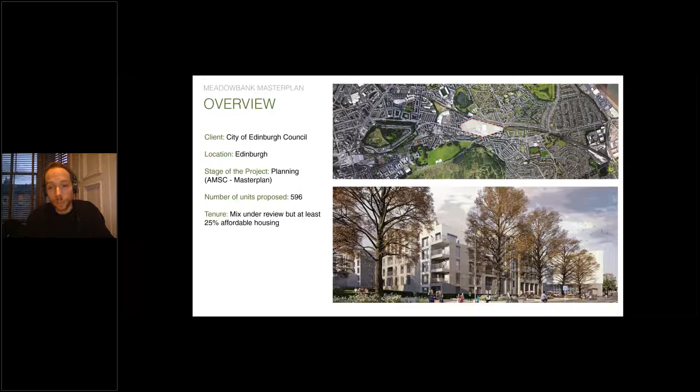The sports centre itself is by another architect, Holmes Miller, but Collective led the housing scheme. There are 596 units of mixed tenure with a minimum of 25% affordable housing proposed. And the project is currently in master plan stage and has just received planning approval.

So this is the approved master plan. You can see the proposed housing surrounding the new sports facilities, a variety of housing types ranging from 2 to 7 stories across the site.

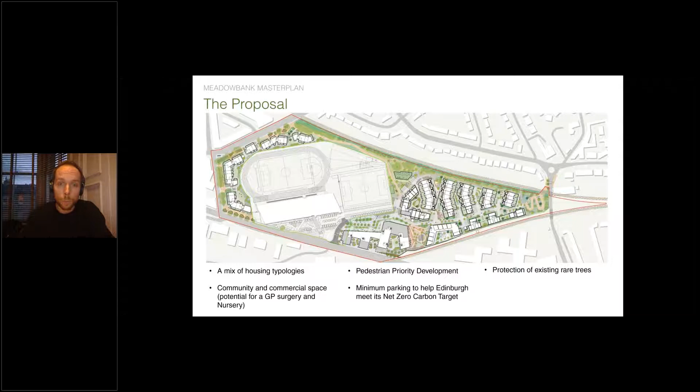So roof types aren't actually specified in the planning application at the moment. No green roofs were considered as part of the scheme before the study. The proposal instead adopts an integrated SUDS approach using swales and rain gardens to treat water runoff. The council will, however, consider how green roofs could be incorporated at the next stage, taking into account the findings of this study.

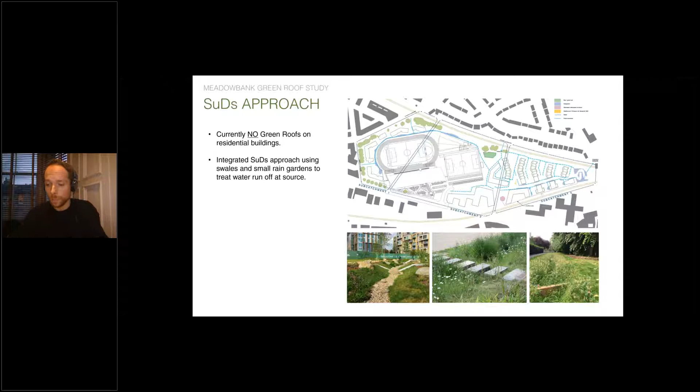Excuse me. So the question we were asked to explore was, are green roofs viable in Scotland? Using the Meadowbank project as a case study. And the key aim was to demonstrate the business case for green roof infrastructure.

Interestingly, unlike large parts of Europe, there are no mandatory policies or incentive schemes at a national level in the UK when it comes to green roofs. London has successfully embedded requirements for green roofs through the planning process and local development plans, with significant increase in their adoption. This has placed a weight of expectation on developers and local authorities alike. However, there doesn't seem to be the same expectation or uptake in Scotland yet.

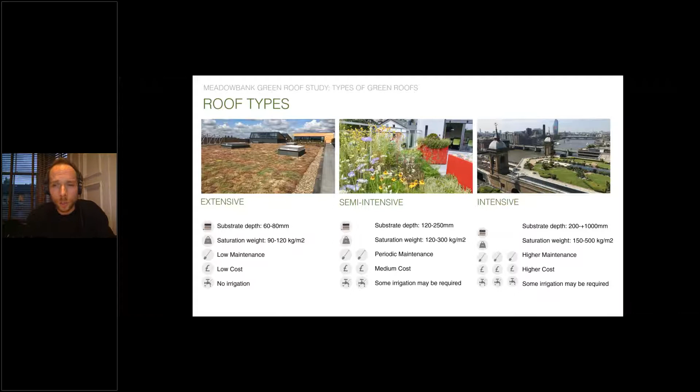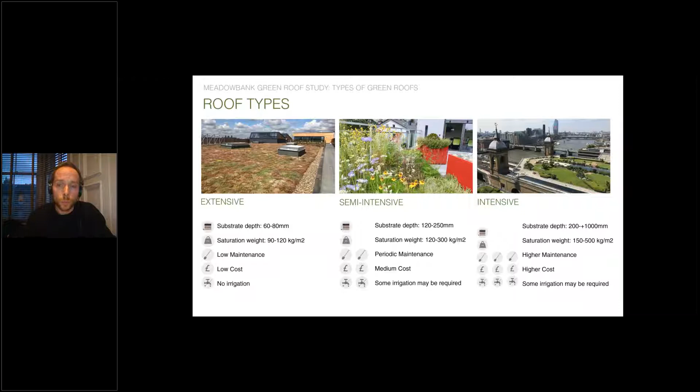So taking a step back, we started to look at the key green roof types. There are three main types: extensive, semi-intensive, and intensive. I'm not going to elaborate on these today, but instead I want to touch on three variants that were more relevant to the Meadowbank scheme.

And the first is the extensive wildflower biodiverse roof. This is creating small topographical variations in the substrate to create a variety of habitats, from wildflower meadows, dry riverbeds, pools, and boulder areas. And this is the type of green roof that our specialist Dusty Gedge advocates over a more conventional extensive roof.

The cost uplift between the two is minimal, but the ecological benefits are significant. The next type is solar green and biosolar, which combines a typical PV array with a green roof. Condensation builds on the underside of the panels and can be used as runoff to maintain the vegetation below, creating unique habitats. And the third is the blue roof, as Ivan has already touched on.

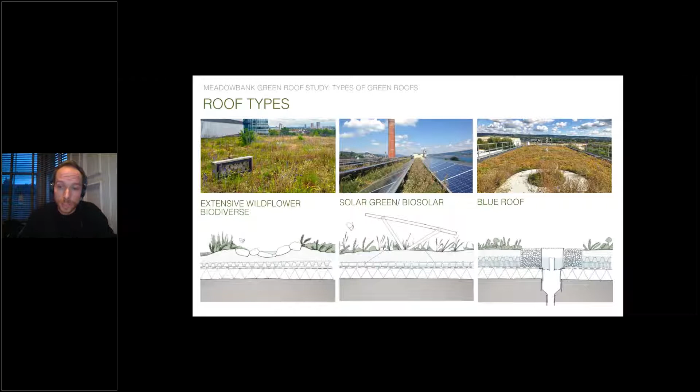In terms of water storage capacity, this is a much more engineered solution using geotech products to create a drainage layer and a void space, which together controls the flow of water to gradually drain to a specified runoff rate. And unlike the other forms of SUDs, blue roofs can really help to free up developable area at ground level, reducing the need for below ground drainage requirements such as attenuation tanks, which is particularly relevant for the Meadowbank site.

We took a place-based approach to assigning the roofs, assigning an appropriate roof type to each building. This took into account how the different roof types can be used to create a variety of spaces, from formal to informal, public and private. Each roof type can create different uses and applications, such as creating opportunities for habitats, play, food growing, and enhancing health and well-being.

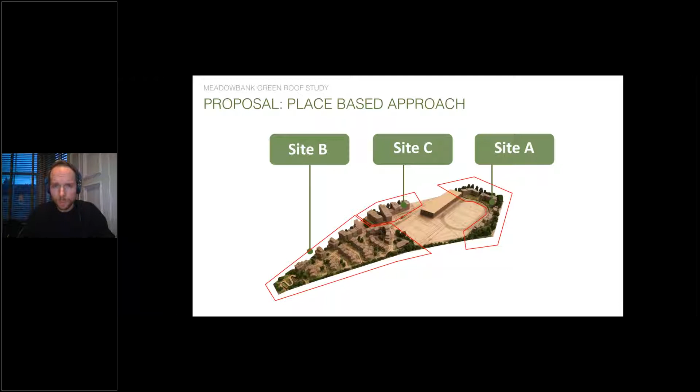Just to give a brief overview, Site A has 5 apartment blocks varying between 4 to 6 stories, bounded by a line of mature trees. None of the roofs were accessible, and the planning proposal includes large attenuation tanks below these buildings at ground level. So this part of the site offers opportunities for extensive biodiverse blue roofs to increase water attenuation capacity at roof level and enhance connections to biodiversity. The use of the blue roofs and rain gardens at ground level would hopefully remove the need for these large storage tanks altogether, as demonstrated in this image.

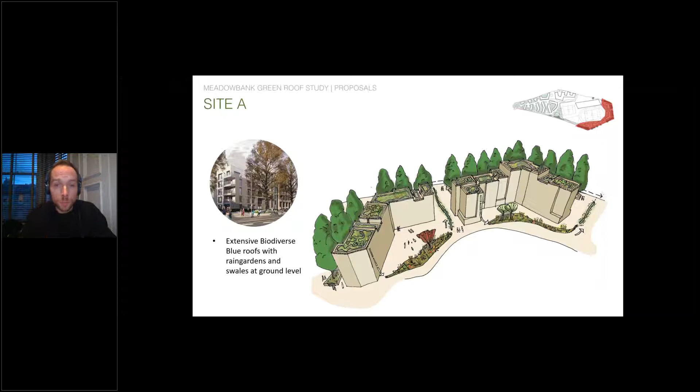Site B has the largest footprint on the site and a variety of slightly lower buildings. Biodiverse roofs could be used to provide visual amenity where they're overlooked, and we imagine that external bin and bike stores at ground level could have biodiverse roofs to maximize urban greening.

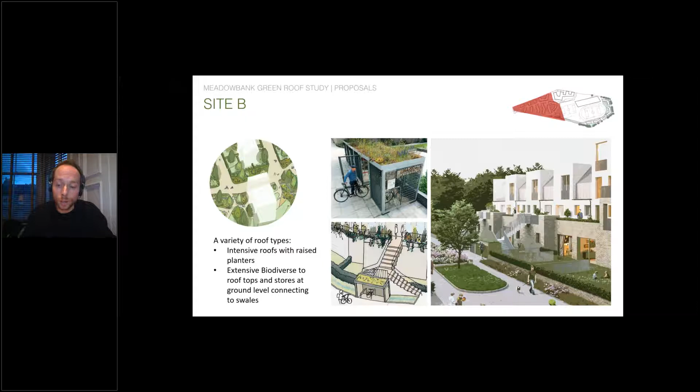Finally, Site C has the highest density of the site. This has the opportunity for publicly accessible podium decks and gardens at ground level, raised podium decks with both semi and intensive roofs for resident access, and biosolar and biodiverse roofs at roof level to enhance biodiversity and energy performance. There's also potential for a GP surgery on this part of the site, which would create a really nice connection between the green roofs and horticultural therapy and learning. There's also opportunities to create unique habitats to support a local and endangered species of butterfly, which is found in the adjacent park.

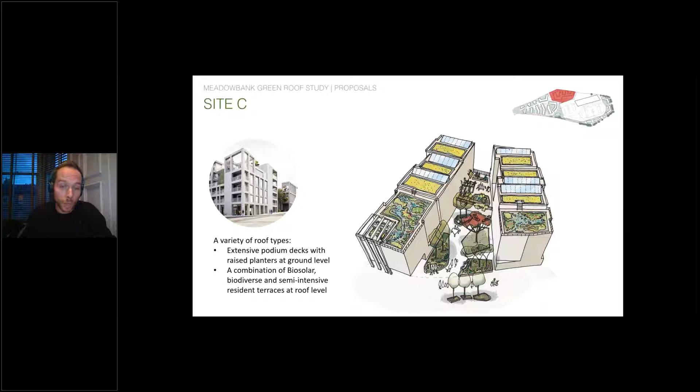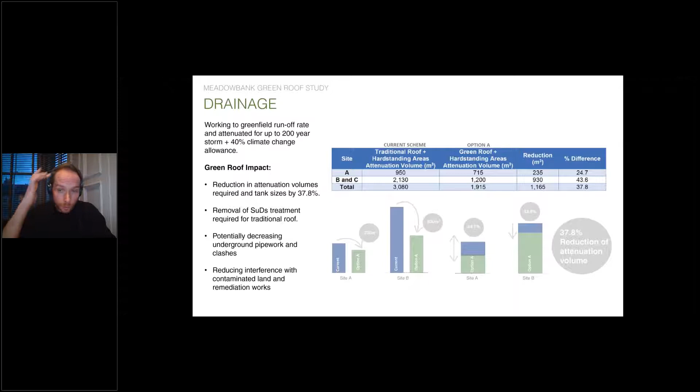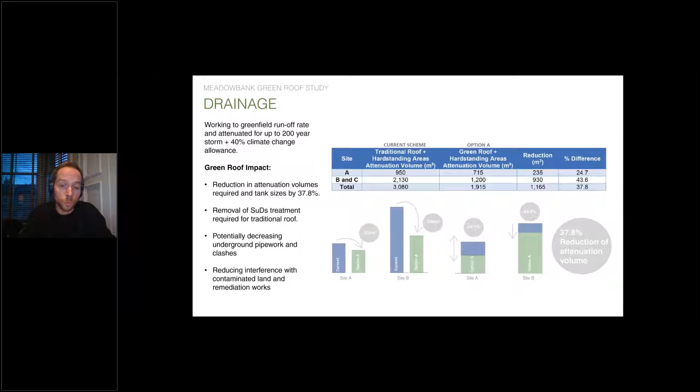We calculated the impact of the attenuation volume, comparing the green roof strategy to a traditional roof approach, which uses below ground tanks rather than SUDs. In total, with the green roof infrastructure, there's a 37.8% reduction in the attenuation volumes and tank sizes. This was calculated based on a greenfield runoff rate, based on a 200-year storm event, plus 40% climate change allowance. This is particularly relevant on brownfield sites where green roofs can reduce the risks associated with underground pipework and contaminated land.

At a very high level, we compared the green roof strategy to a single SUDS pond approach. What if we consolidated the attenuation volume in one place? What would the impact be? Based on the average site density of 110 homes per hectare, we calculated that the pond would take up an area equivalent to 40 homes. So in effect, the green roof helps to release developable area on the site.

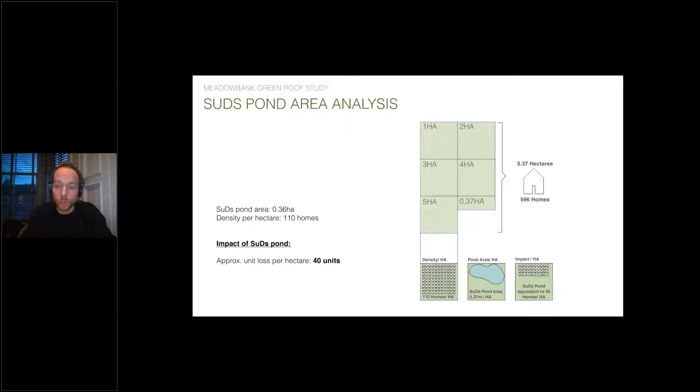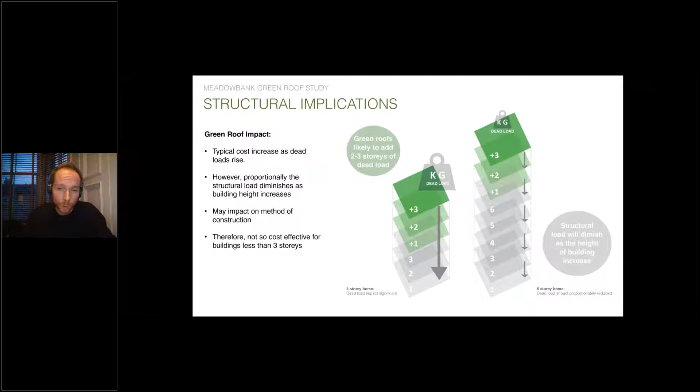In terms of structural implications, very briefly, the headline is that green roofs add about 2 to 3 stories of dead load onto a building. So this limits how cost effective this is and may impact on the form of construction.

Moving on to climate change, the impact of green roofs on this issue. In the UK, buildings are responsible for 44% of CO2 emissions, and 26% of this comes from housing alone.

So how can green roofs help this? It's all fairly obvious stuff, really. Cooling buildings is the main one. Green roofs help to also cool the air. Increasing greenery leads to improved air quality, reduction of heat island effects, and stormwater management is a big one too, as I mentioned earlier.

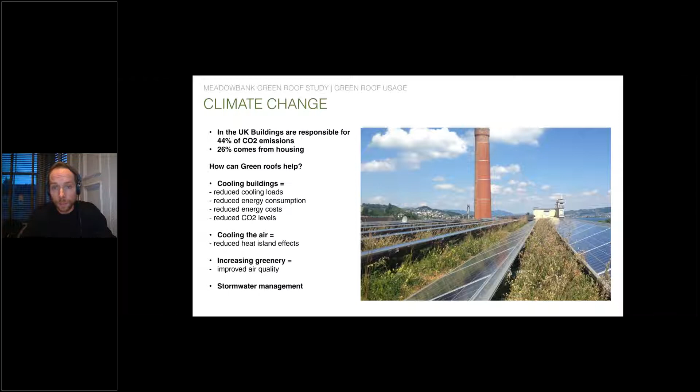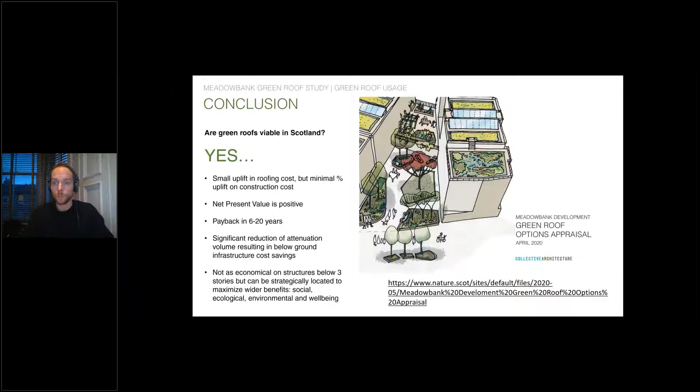That's great. Thanks a lot, Mike. Yeah, and thanks for giving out that reference, because actually, as well as just the information about the site itself, that report is almost like a manual in terms of the different types of green roofs available.

So yeah, I'd encourage people to look at that. I was struck actually by some of the images in that, really quite similar to some of the images from the carbon conscious places work that ADS were talking about yesterday. So there's some co-evolution going on in terms of some of the thinking there. And the other good point about Meadowbank is it's very near the Scottish Parliament, so if we do get green roofs there, we can drag some MSPs along to take a look at them.

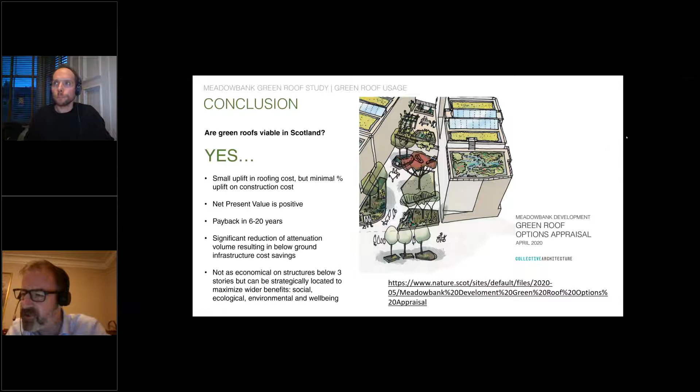So that's great. Hopefully Sheena's now available for her presentation. She's going to talk about a project in Cardonald in Glasgow, and this project might actually already have spades in the ground, but if not, it's certainly a shovel-ready project and ready to go. So it's a project we should be able to go out and see when things improve, let's just say. I think Sheena's just trying to share her screen.

Let me know if I need to do anything, guys, will you? I'll stop sharing my webcam. That's probably might help.

Thanks, Ivan. Yes, good afternoon, and thank you for inviting me to speak at today's Partners in Planning conference. My name is Sheena Raeburn, and I'm a landscape architect and director of Raeburn Farquhar Bowen. Today I'm going to talk about a really exciting collaboration between Southside Housing Association and Glasgow City Council, who are working together in partnership to enhance residents' gardens and deliver climate resilience in the wider area.

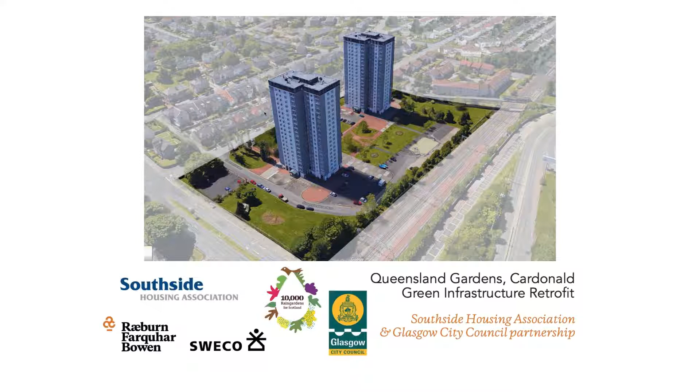SWECO and Raeburn Farquhar Bowen were appointed to provide a retrofit green infrastructure landscape design that improved the environment for residents who live at Queensland Court and Queensland Gardens, which are these two 19-storey blocks of flats that you can see on the screen. But these improvements will also reduce the flood risk for residents in the Cardonald and Hillington neighbourhoods. This is part of a wider strategy to make the city more resilient to the impacts of climate change in the future. So the site is located on the west of Glasgow, just below the Queen Elizabeth University Hospital.

It's quite an interesting site in that it's bound by the railway and the M8 to the north, and Cardonald railway station is just to the east, and it's surrounded by existing low density housing.

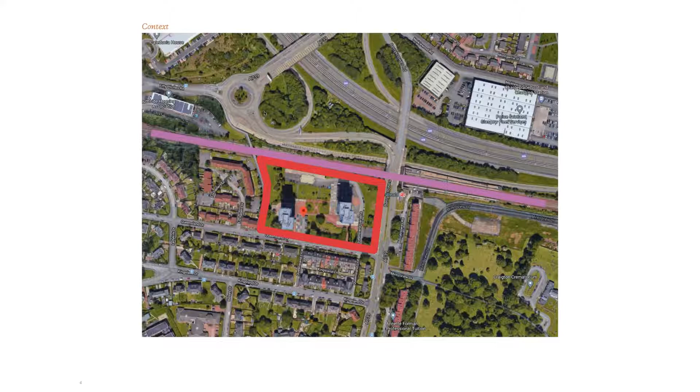So Southside Housing Association wanted us to look at the grounds around these two multi-storey tower blocks. You can see it's quite a generous setting, and the vegetation and mature trees along Queensland Drive are quite attractive, and the gardens and grounds have been well maintained by the Housing Association. But there were a few issues, and there were a few opportunities to actually get much more out of this landscape than it currently offers.

At the moment, the parking provision on the Cumbria block, which is on the left, is quite insufficient, whereas there's an over provision of parking space and roads for the Butte block, which is on the right.

Aside from the trees fronting the street, there really was a lot of hard standing and grass areas with no obvious function or use. There was a small games court to the back, and that was the only element of play provision.

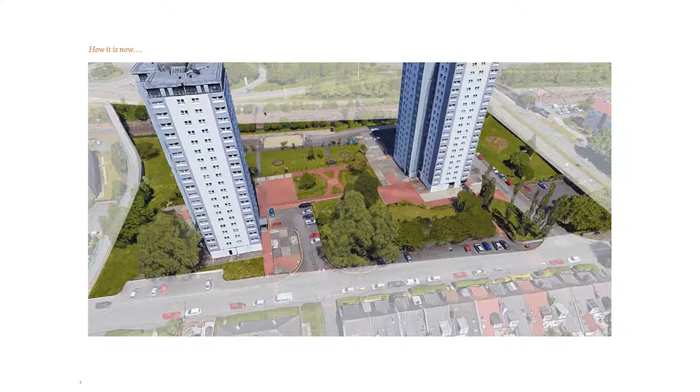So the client at Southside was very keen to see what we could do to improve this.

From Glasgow City Council's perspective, they're facing a large part of the city being exposed to climate change and risk of flooding of residential properties, and the associated costs and impact of damage to properties. There was also recognition that the traditional drainage system in the city was almost at capacity, so they prepared a surface water management plan for different areas in the city, including Hillington and Cardonald.

They wanted to see measures that could help the surface water runoff by slowing it and storing it for short periods of time within the landscape, mimicking nature as much as possible to be a natural sponge.

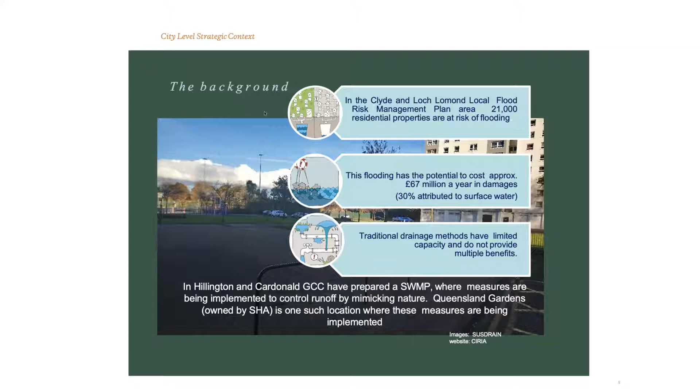Queensland Gardens was identified as an opportunity where we could look at how we could implement flood resilience and climate change resilience within these grounds.

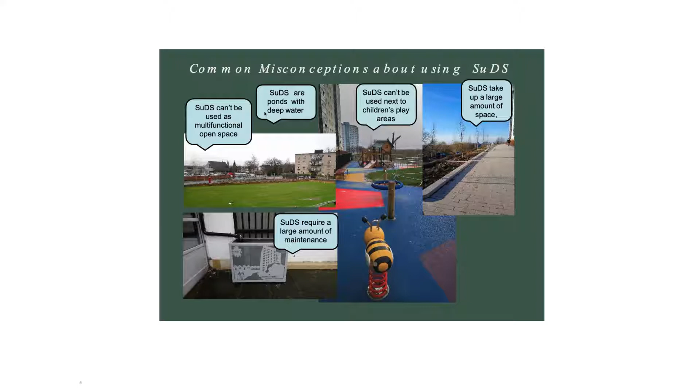There are a few common misconceptions about surface water drainage features - that these are just ponds with deep water, or they take up a large amount of space, or they can't be next to play areas, or they need a lot of maintenance, and that's really not the case.

We can integrate right from the beginning, and retrofit - in the case of Queensland Gardens - the spaces around houses to be multifunctional spaces that filter and slow down the rainwater, but can also be really attractive garden spaces.

They can be spaces for people to enjoy and look onto, but they can also improve biodiversity and ecology of a city, and act as habitats for pollinator species, which is really important.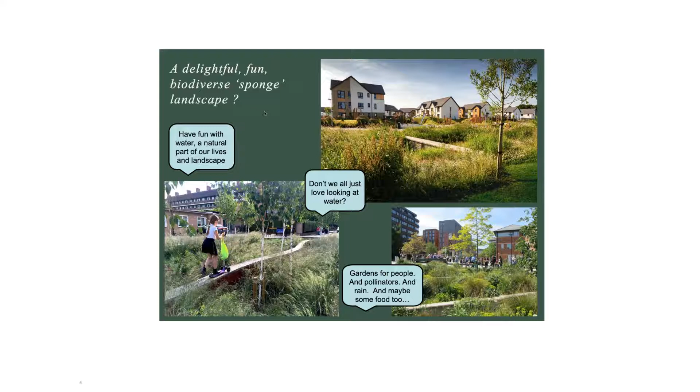The image at the top is actually a scheme we designed and delivered for Bertha Park in Perth, a new housing development. It's going to be 3,000 homes eventually, and right from the beginning we've integrated surface water management at the heart of the development. You can see in the background there's also play right next to the housing, so these things can all function together.

The Housing Association saw a real opportunity to partner up with the City Council. They saw that they had the space to help with reducing the flood risk to a wider neighbourhood, but also that there was scope for educational opportunities or improved outdoor spaces for play, community socialising and improved well-being, and they could pool their resources and costs together to get both of these outcomes.

Part of the consultation we did in the grounds with local residents - people told us that there's a lot of space around these buildings, but very little they can do in them. There wasn't much for kids to do, but there was also a larger older population that had lived in these flats for a long time, and they were keen to have somewhere they could look onto and go to socialise and meet up.

So that really started to inform our brief in a way, and inform how we set out the design and the master plan for the space.

So we were able to give more parking spaces to the block on the left that needed it, but we were able to reduce the road and hard standing and consolidate the parking for the flats on the right, and that freed up quite a lot of space for other things.

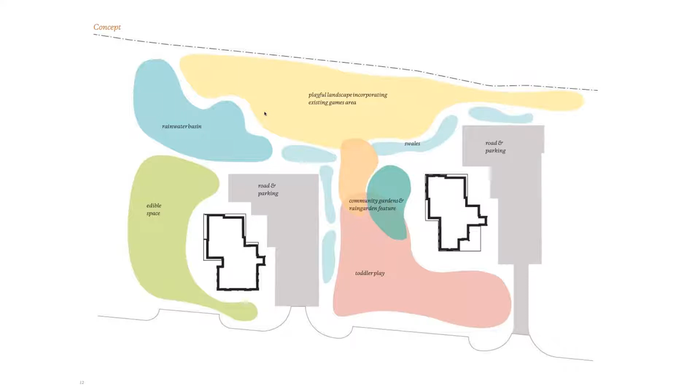There was also real scope here for edible spaces, for a community garden, for play, and that's at all levels, at toddler level and more challenging play for older children. So the master plan here shows the arrangement and layout, and actually we were able to really maximise what we could do with the space.

The excavations for the drainage features resulted in an opportunity for us to actually use that material on what is a fairly flat site for maximum interest in the play area. So we've got these mounds and these little topographic features that you can build bridges between, have play slides form, and keep that material on site. So in terms of sustainability, it's an efficient way to use that material.

There's also a community garden between the two blocks of flats that we saw as a way of being a space for both sets of residents, and an existing garden area that faced onto Queensland Drive, where although that was fenced off on the roadside, we could just extend some fencing and hedging, and that became a safe space for toddlers and smaller children to play in within the grounds.

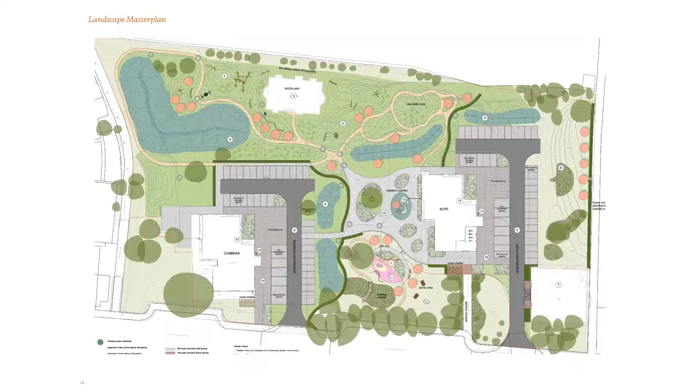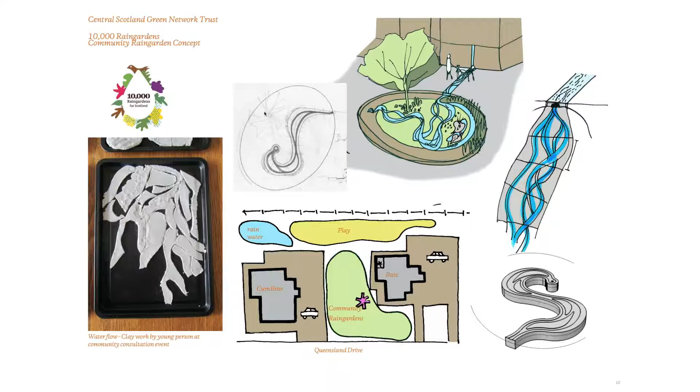That really inspired us to develop a feature piece that brought the rainwater from the roof down through the building and back out into the landscape. You can see the water flowing through this garden area, and these ribbons of water channels will then link into the swales and the rainwater basin. That became a centrepiece and focal point for this whole garden area.

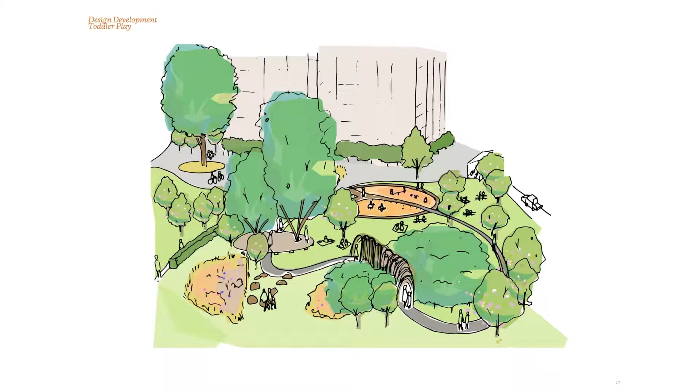This is a little sketch view of the toddler play area. We're keeping a lot of the existing trees here and just creating a route through and a play deck and a willow tunnel and some picnic benches to really provide that setting for these smaller children.

We decided to keep the games area because it is something that is well used and it allows kids to throw a ball about and be active, but also there was scope for more natural play integrated with planting and trees and mounding that we think works well as a contrast.

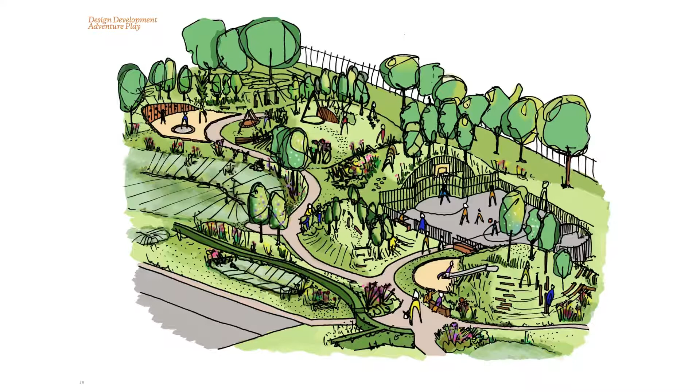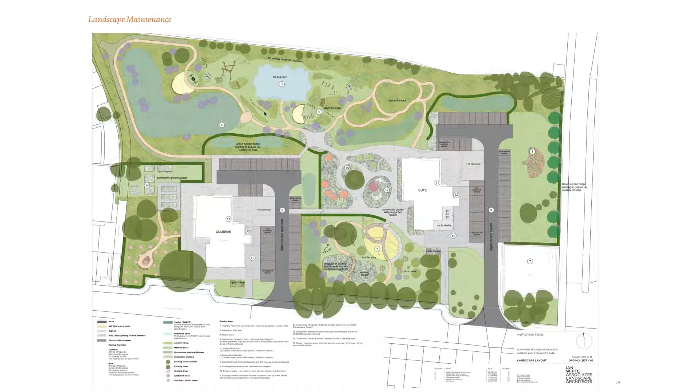The landscape maintenance is something that had to be considered. Southside Housing Association look after the grounds really well as they are, and the maintenance regime will change slightly as a result of these new proposals. However, it's worth emphasising that the maintenance of the rainwater features is really part of the landscape maintenance. You're looking after landscape as much as anything, and you might be clearing out filters now and again, but really it's part of the landscape, so it's no more onerous than maintaining any other gardens and grounds. It's worth emphasising that this is being made possible by a number of funding sources, pulling together different grant bodies to actually deliver this.

A big part of that was the Green Infrastructure Fund from NatureScot, and the Scottish Government. Where the project is now, the detailed design has been done and the project is out to tender, with construction due to start early in the new year. It's a really exciting prospect that the gardens around these blocks of flats are going to be enhanced greatly for the residents, but they're also going to contribute to the wider strategy for climate resilience in this part of the city. So it's a very exciting project to be part of, and thank you for your time, and I'll hand over.

Hey, I'm unmuted now. That's good. Thanks, Sheena, that's great. I'm really looking forward.

You might have seen me there handing that massive check over, and that was a really fun day, something I've always wanted to do. So I'm really looking forward to actually seeing the shovels go in the ground and seeing the final results. I think that's a really good example of a relatively small project, but it adds up along with lots of other stuff Glasgow Council are doing, to a big strategic response that Glasgow Council are making in terms of the climate emergency. Can't wait to see the results of that.

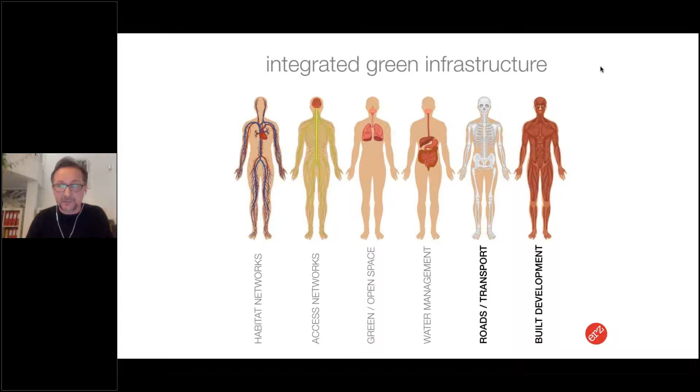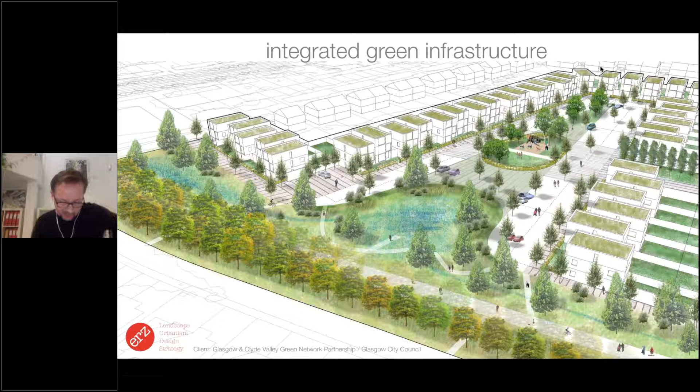This project example is one we worked on about 10 years ago, for Glasgow City Council and the Glasgow and Clyde Valley Green Network Partnership. It was focused on Nitshill, looking at basically the southwest extent of the urban area of Glasgow.

I'll touch on this and a few others to give a sense of our strategy and master plan, which are all informed through this same layered analysis of the different systems, looking at built form, transport, green infrastructure, water management, and so on. These strategies identify opportunities to realize the maximum positive impact, delivering multiple benefits so that the landscape and public realm delivers a range of functions.

To draw that out, this is a promotional graphic we helped Glasgow Clyde Valley Green Network develop, to highlight that layered approach and multifunctional green infrastructure approach, and to link that also to policy.

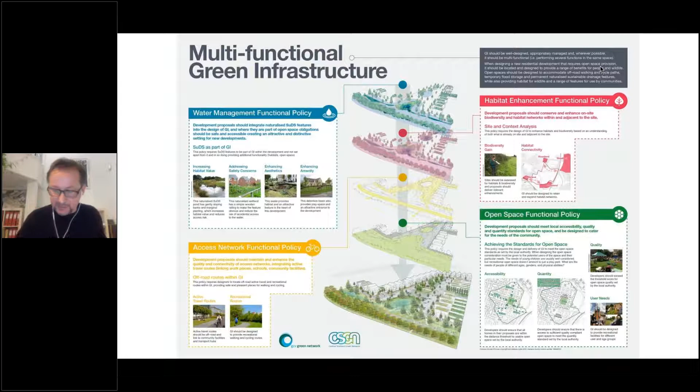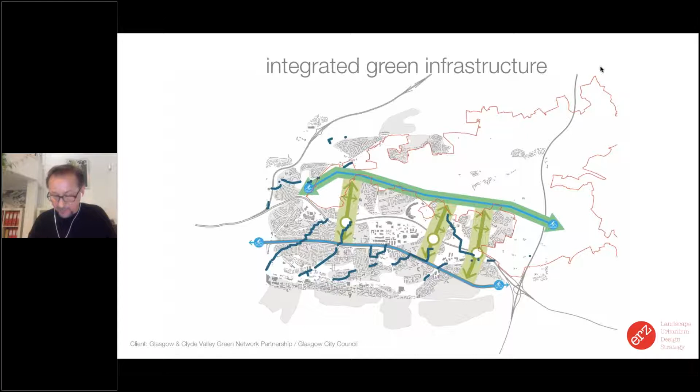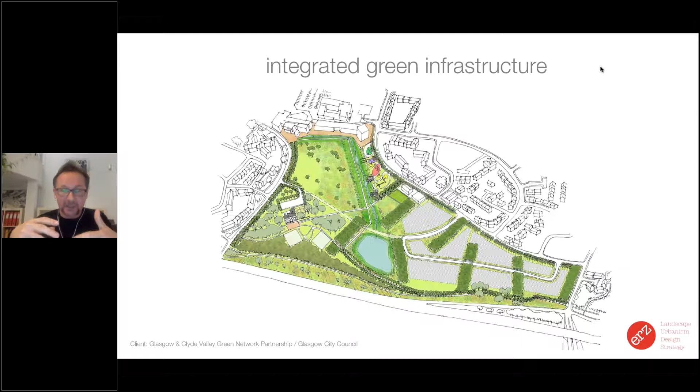On a similar basis, at the same large strategic scale, this was a piece of work again for Glasgow City Council, essentially looking at the whole area of Greater Easterhouse in the northeast of Glasgow. The same layered analysis of the different systems - this diagram's looking at what came out of that in very broad terms: active travel, the green network links, and surface water management. From that, in key areas of anticipated change, we looked at those in more detail at a master plan level, looking at green infrastructure as an enabler to anticipated development.

Similarly, we've been working on a number of hospital campuses. This example is the Foresterhill Hospital campus in Aberdeen. I think the reality with hospital campuses, particularly since the mid-20th century, is that they've tended, by necessity, to grow incrementally, having to respond to immediate needs and opportunities, and evolve into environments that arguably don't use the available space very well. The routes around them aren't legible, and it can be a very confusing environment for people visiting the hospital. So we developed for NHS Grampian a campus-wide landscape and public realm strategy looking at creating usable spaces, legible routes, helping to enable future development, and incorporating, importantly, surface water management.

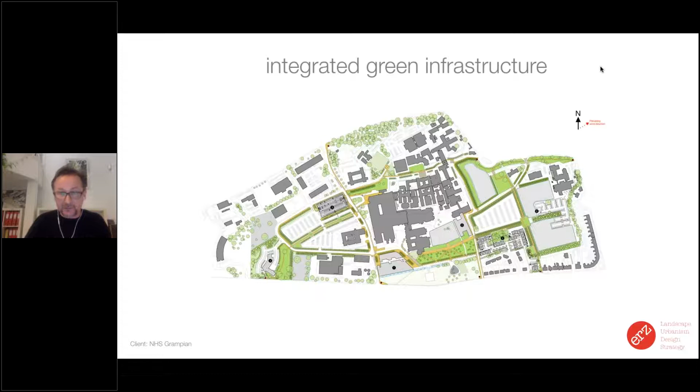Again, really focused on multifunctional green spaces. Another project hopefully shortly to start on site in the new year is the phase 1 green infrastructure project at Foresterhill, which is incorporating surface water storage features into public landscape, designed so that it's safe and something people can positively interact with.

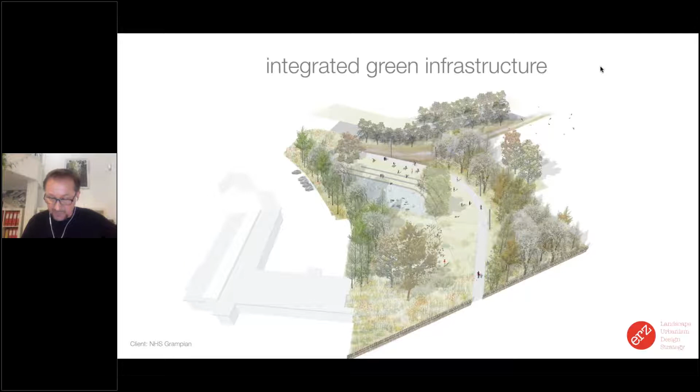And through a similar process, the work we're currently doing for Maryhill Housing Association and their various partners, including NatureScot, developing a green infrastructure master plan for a new neighbourhood in North Maryhill.

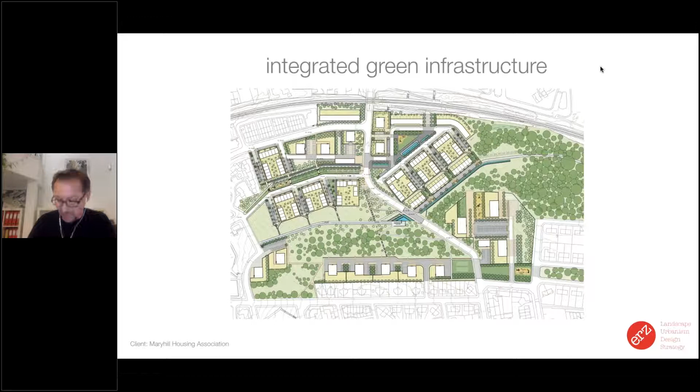The existing situation on this site is a series of residential towers sitting in the context of cleared housing land and derelict green space. The site sits on the north side of a large hill, so steep slopes dominate parts of it. The site is broadly surrounded by wider citywide active travel routes and connections, but disconnected from them more locally. We worked through the same layered analysis process, looking at all these different systems, and that underpinned the development of the master plan.

The master plan incorporates surface water elements in this landscape spine. You can see these as linear blue elements here, tied in with the green network and the active travel routes.

Given that this is a large north-facing slope, in terms of surface water running down into the flatter, lower lying areas of the site, which are really the more developable bits, we're essentially capturing that water before it gets into the lower parts of the site, managing and dealing with it. What this does is release those lower, flatter parts of the site for development.

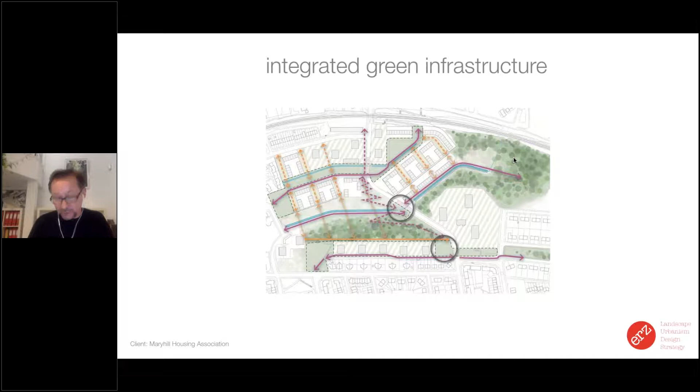With these various links, it ties the new neighbourhood into the wider active travel network, to local public transport links, to the local shopping streets and the community facilities in that area.

There are a few images here just to give an overview of that, and you can see in the background of this view where some of the steeper slopes are, there's existing woodland and the enhancement and management of that.

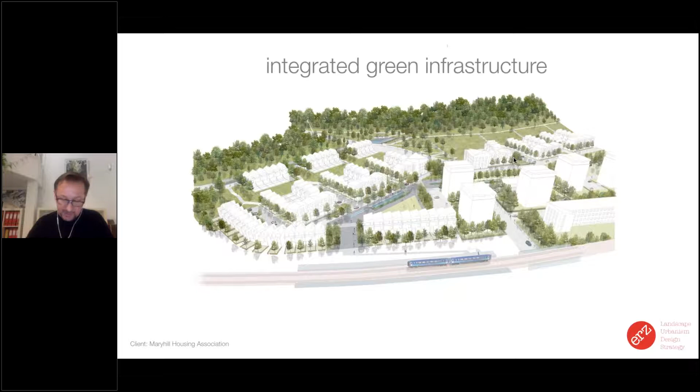You can see the connecting active travel routes and associated water management elements within that. And through the core of the new neighbourhood, more towards the foreground of the view, a spine of community green space incorporating a whole range of facilities for the residents.

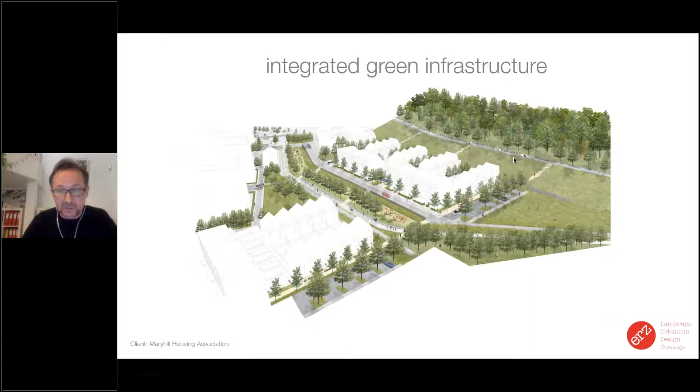And again, another view here, focusing more on that spine through the core of the neighbourhood and the spaces there for the new community.

And another view in the upper part of the proposed master plan, which shows, in this zone, a larger scaled water management feature that's capturing water partway on this slope and dealing with that.

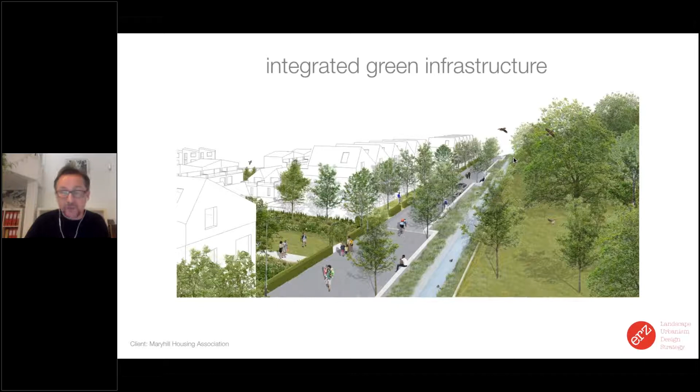So apart from the drawings, it's obviously great that these projects become delivered.

So I think that's me, and I'll hand back, if I can figure out how to do that, to Ivan. There you go. At which point someone's phone goes off. That's great. Yep. Thanks, Rolf.